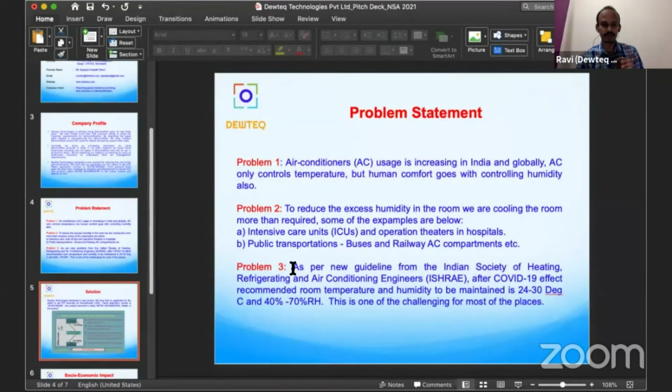So I can show a product. It looks like this, a simple heater. When it goes to AHU models...

Sorry, are there any questions? No, please continue.

Okay, so this is for a room. Even though it's a simple concept, there are no standalone products available all over the world. If you install a simple heater, for example take a small room, this 4-panel heater with no air, just a panel heater, it will take care of humidity. It works along with the air conditioning. You don't need to set really lower temperatures, you can even set 26 degrees centigrade and 50% RH, and you really see very comfortable ambient conditions inside the room.

When it goes to a factory, we have an AHU model with the same sensor and heater combination. Depending on the air conditioning capacity we add, we don't need really expensive dehumidifiers there.

So that really reduces the cost of installation, initial investment, as well as power consumption, because when we don't need to really cool down, the air conditioning cost really comes down.

IISc really helped us, Indian Institute of Science, to complete this project. Last month we demonstrated all the technical papers. Now we're going to production. That's all about this. Thank you for giving me the opportunity.

I am Dr. V. Rajkumar, Assistant Professor from Indian Institute of Technology, Jammu. Quickly, I will tell you about my research experience. I have done 3 types of postdoctoral research fellowships, and I've been working on additive manufacturing for close to a decade. Now I have started working at IIT Jammu, and our core development is to develop and build a research center for additive manufacturing technology at IIT Jammu.

Our core development is focused on 3D printing machines. We are developing homemade 3D printing machines, whereas commercial machines are quite challenging, with limitations on using materials that limit our research activities. So we are developing homemade 3D printing machines, which we are also focusing on integrating with artificial intelligence, as I've mentioned here.

There are different additive manufacturing technologies: selective laser sintering, fused deposition modeling, and direct metal deposition. These are 3 different, already commercially successful candidate machines, and we are developing our homemade version, incorporating artificial intelligence technologies.

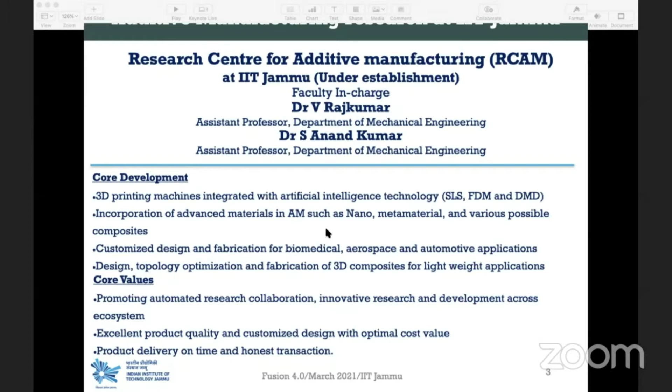Our focus is on making new materials, advanced materials, nano materials, meta materials, and various possible composite materials, as well as customized designs, eventually focusing on biomedical applications, aerospace, and automotive applications. The main objective is to gain good, optimized designs, topology optimization, and fabrication of 3D structures or composites, particularly for lightweight applications. This is our core development and values.

When it comes to the evolution of Industry 4.0, I have been following the last 1 hour lecture, so we have already discussed these types of images and what 4.0 is.

My understanding of Industry 4.0 is that cyber physical systems form the basis of it. They use modern control systems, have embedded software systems, and an internet address to connect and be addressed via the Internet of Things. So Industry 4.0 is intelligent networking of machines and processes for industry, supported by a lot of information and communication technologies. This is what we understood as mechanical engineers and manufacturing design engineers, and we would like to incorporate this technology with additive manufacturing technology.

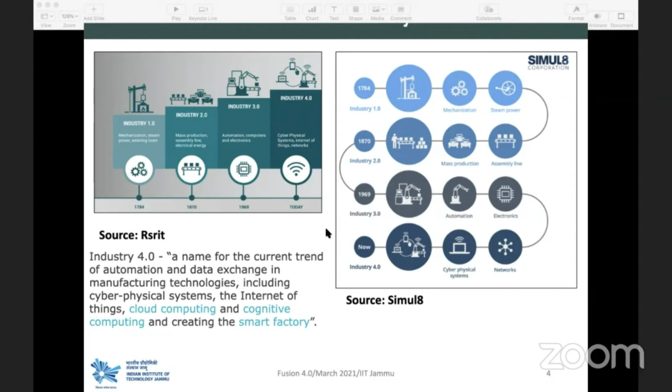When it comes to digital enterprise, all these things have been digitalized, and eventually we are focusing on the real world, functional, operational environment end use.

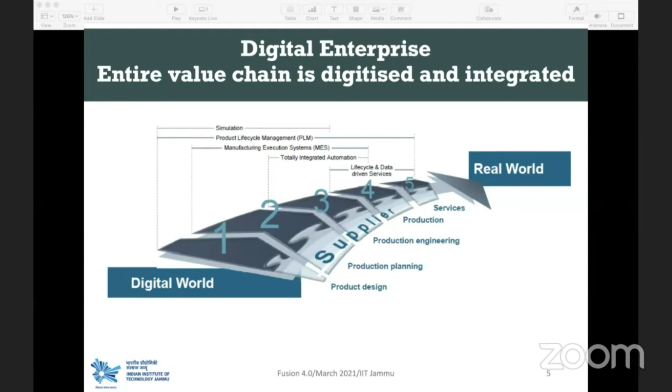When it comes to potential applications, first is robot-assisted production, and second is maintenance. We discussed this with Professor Dimitrios from Swinburne University, who gave laboratory research about predictive maintenance. The third part is additive manufacturing of complex parts. These are the potential implications of Industry 4.0 that we are focusing on.

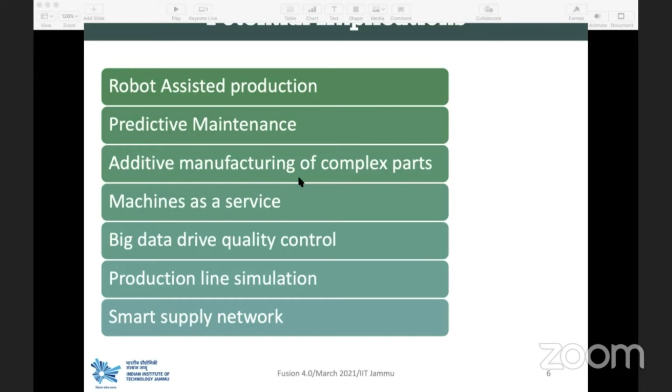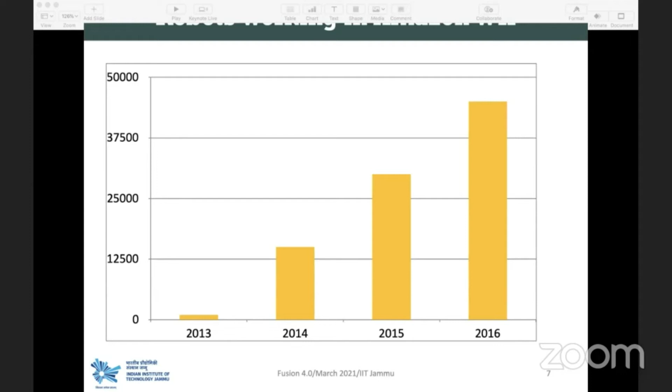When it comes to robots working, this is an example where Amazon is working a lot with robot-based systems, and they have successfully implemented these, growing day by day in their operations. These are the key technologies which are focused on in Industry 4.0.

Our focus is on additive manufacturing, how it has been incorporated with Industry 4.0, and what other feasibilities exist for integrating key technologies with additive manufacturing technology, to further increase production capability, reduce the supply chain of manufacturing units, or create a smart, intelligent-based manufacturing system.

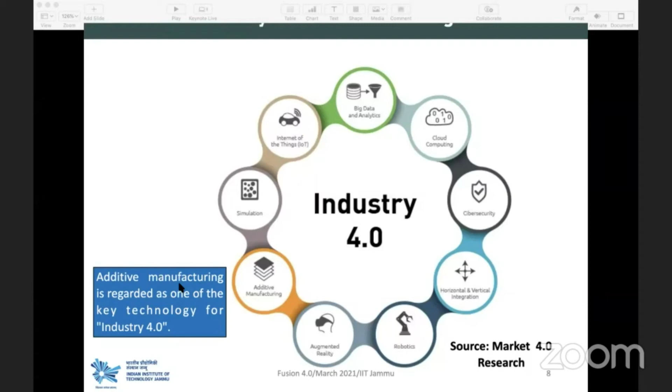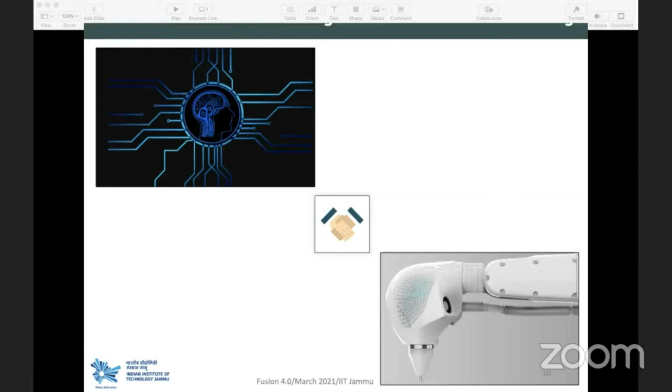When it comes to the role of Industry 4.0 and its technologies in additive manufacturing, before explaining that, I would like to give a brief introduction about additive manufacturing technology. Additive manufacturing is nothing but layer-by-layer manufacturing, whereas the existing, commercial, or traditional way is subtractive manufacturing technology.

There are 2 stages: the virtual stage and the physical stage. In the virtual stage, you can make any scanners or mathematical representation, or any MRI scan report, that can be converted into a 3D model - that is all virtual stage. This 3D model can undergo computational simulation and scientific visualization to understand more about the technical features.

Then you can go for the additive manufacturing technology, where the machine is ready. It takes the input as a 3D model and does layer-by-layer processing to get a functional end-use product. The commercially successful machines are selective laser sintering, FDM, direct metal laser sintering, polyjet, etc.

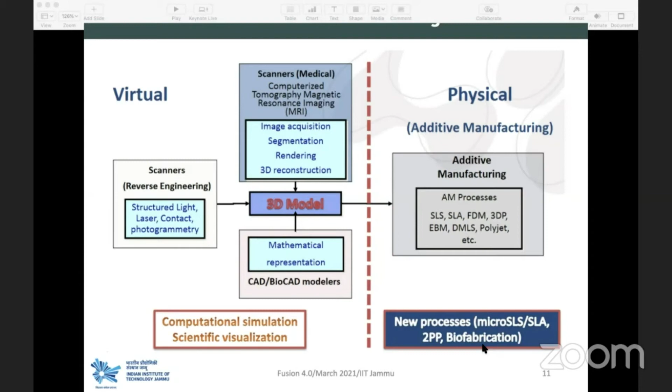Nowadays we are all focusing on micro selective laser sintering process, or SLA, as well as biofabrication for medical applications. These are the different types of additive manufacturing technology.

Mainly we can divide them into 3 categories: solid-based additive manufacturing technology, powder-based, and liquid-based additive manufacturing technology. From there we split into different types of machines, and based on the component or the end-use product, we select an appropriate technology as well as the material application.

If you are using a powder-based one, we can use the second approach. In powder-based, whether it is a polymer or metal powder, different types of materials can be processed with different additive manufacturing technologies.

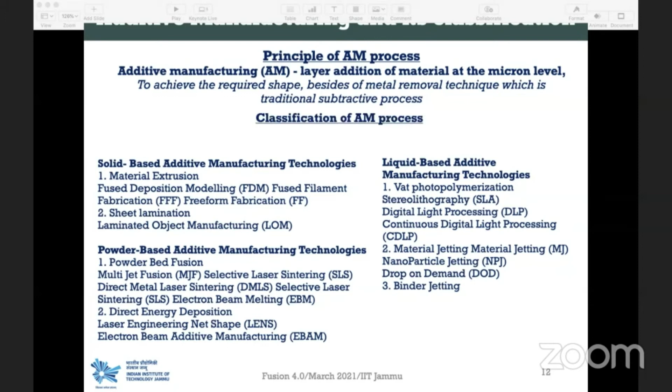How does the additive manufacturing process change manufacturing? That is the main criteria we are focusing on - low volume production, where if a product is going to be an end-use component, we manufacture it through the AM process. So we can directly make it without any casting or molding process, and material wastage is 100% avoided using this AM process.

We can do mass customization, and the quick advantage is rapid design iteration. Quickly you can make a rapid prototype of the functional end-use products, observe its functional use, identify failures, and quickly go back and adjust all the parameters, taking the prototype for iteration.

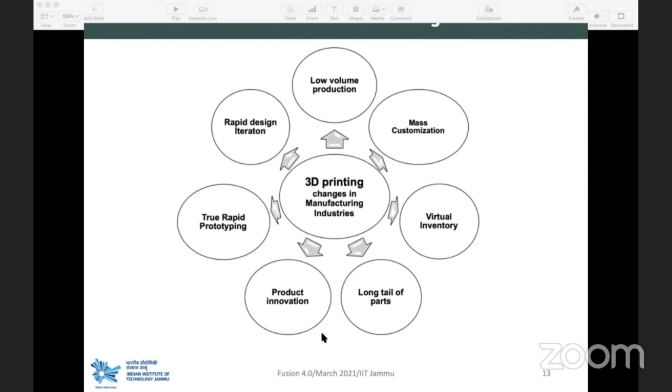There's no need to go for end-use component production for research works. It's true prototyping with products and innovations - you can make parts as complex as needed, so you can do all the optimization too. These are the main advantages.

Based on this, our project is proposed on the design and robotic fabrication of 3D composites. We are incorporating robotic as well as additive manufacturing technologies for a 3D composite technology. This is like digital manufacturing and design.

It starts from geometry and information acquisition, then digital design and computational engineering, then computational manufacturing, and finally digital fabrication and assembly. This is what our focus is.

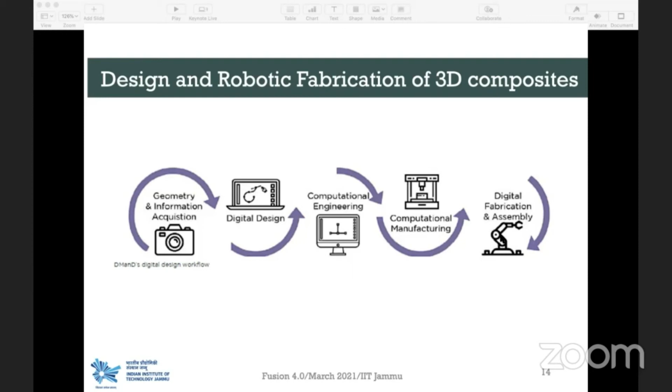Based on this focus, we proposed an automated fiber placement process - a composite material fabrication technology. These fibers, shown in black and gray color - the black fibers are carbon fiber and the gray is the matrix - are in the form of tape, and they will be laid up on top of the mold surface.

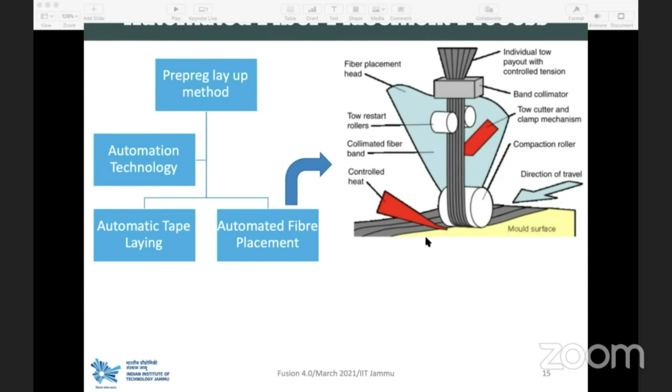Once the material is laid up on the mold surface, post processing will be done and the end-use product will be taken out from the component. This is the automated fiber placement process.

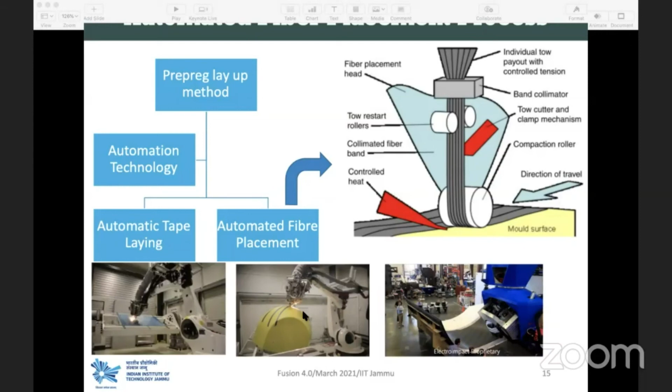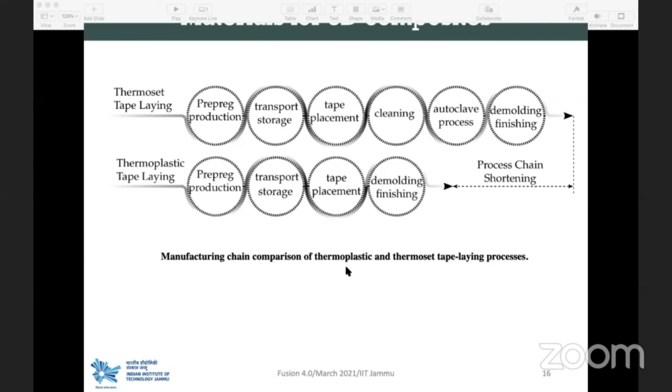So to avoid that, and to create everything together in a single unit, we propose materials for 3D automated fiber placement process plus 3D printing components. The material we are focusing on: if you use thermoset tape laying material for the automated fiber placement process, it involves a different kind of things. If you go for thermoplastic, it will end up shortening the process chain. As mentioned, for the automated fiber placement process, we use a mold and place material on top of it.

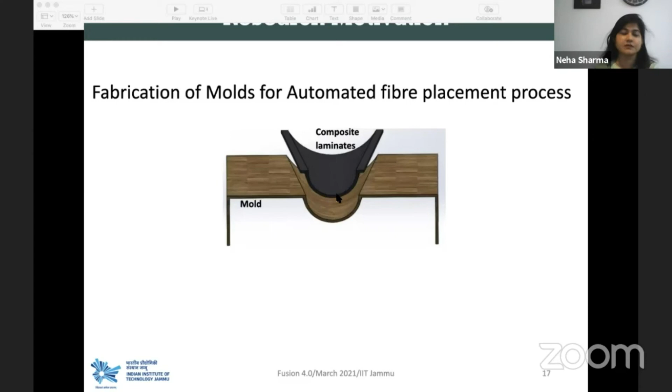For preparing the mold, we are focusing on a 3D printing system, and fabrication of the 3D printed mold and tools involves design freedom, low material wastage, and automated fiber technology.

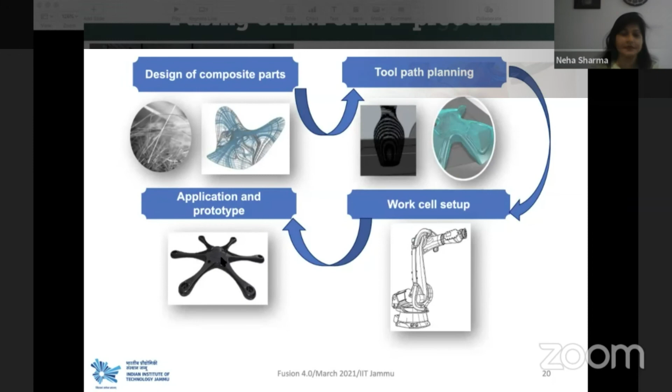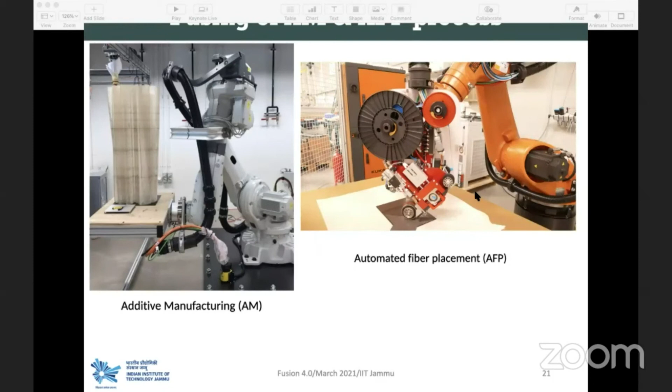This is our methodology: design the composite parts, tool path planning, work cell setup, and application and prototype robot. This is the automated fiber placement robot. So we are planning to merge them together, getting very effective composite parts with a short duration and no need for a lot of expertise.

How is it going to be fused together? There are two robots: one is the additive manufacturing robot, and the other is the automated fiber placement robot. The additive manufacturing robot is used to make the mold material, and once the mold material is fabricated, this robot arm will turn around to face the automated fiber placement robot, that is robot 2.

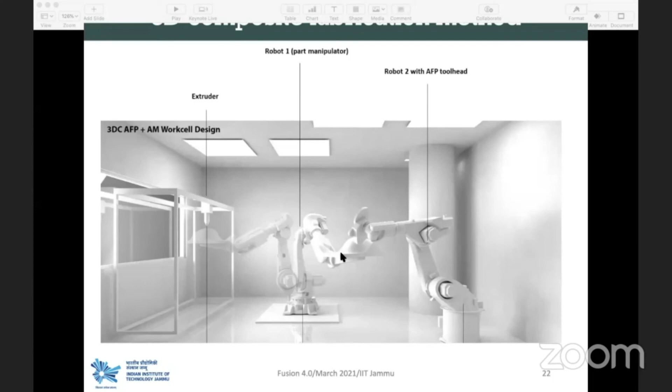This robot will place the fiber placement on top of the mold material, and it will go back again for 3D printing if required. Otherwise, we can place the fiber placement on top of it and take the component out.

I will show you the principles of how it works. This is additive manufacturing technology, where 3D printing of the mold structure happens. Once the mold structure is ready, we place the fiber placement on top of it, and once the fiber is placed, we can turn the robot around again for 3D printing. You can see the complete composite surface and structure developed based on two robots, without hesitation, without time wasting, and without extra production time. These are the main focus.

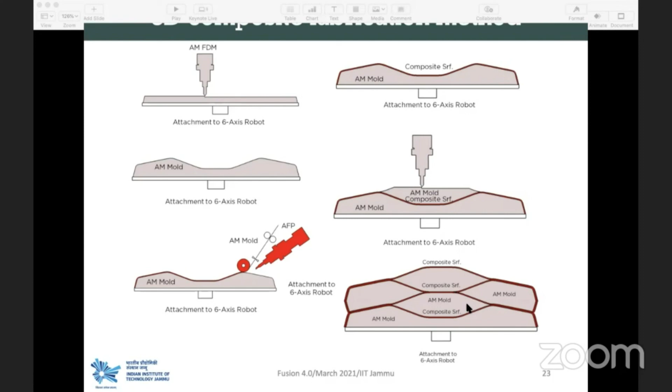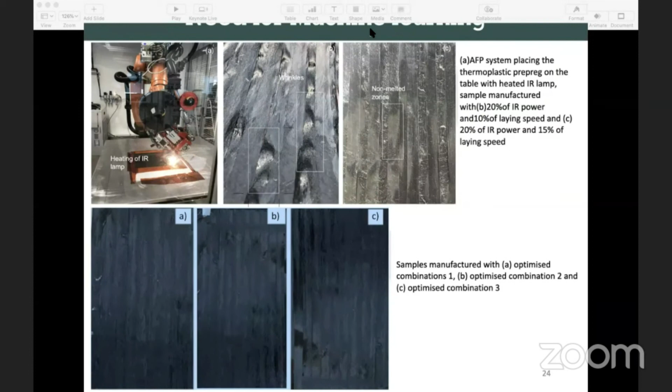So to avoid these issues, we are incorporating a machine learning system to improve the production rate, and we're going to get an end-use product that is completely optimized and fully fused. So the end-use component will be expected in this way.

These are some applications we are focusing on: GOODAero Raptor wing, UAVs, furniture and lifestyle, and orthosis. Similarly, we are doing all sorts of additive manufacturing technology. This is one form, which is robotic fabrication. The other form is selective laser sintering process, as well as direct metal deposition, which also involves different metal-based materials and end-use components.

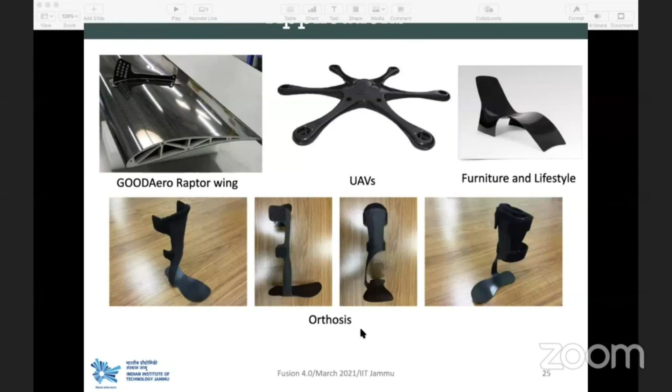These are our research focuses, and these are all we are doing for additive manufacturing technology along with artificial intelligence. Thank you for giving me this opportunity. You can contact me for any collaborations or research work based on these titles, whatever I discussed today. And thanks to the Fusion 4.0 team for organizing this virtual conference and giving me the opportunity.